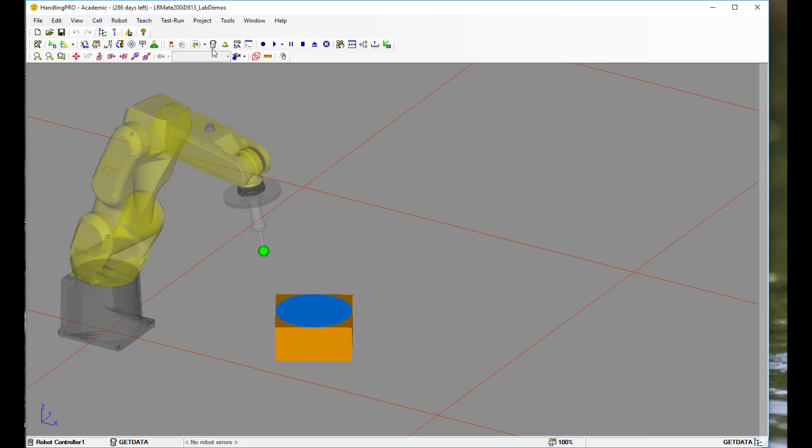So I'm just going to start up the Teach Pendant. Right now, before I do anything with the robot and starting a new program or a new frame or anything, I want to make sure it's in a neutral position. So when you first start out, click the position button. What you want is to have most of the joints pretty close to 0, except for joint 5, which should be close to 90 degrees, which means that the pointer would be pointing straight down.

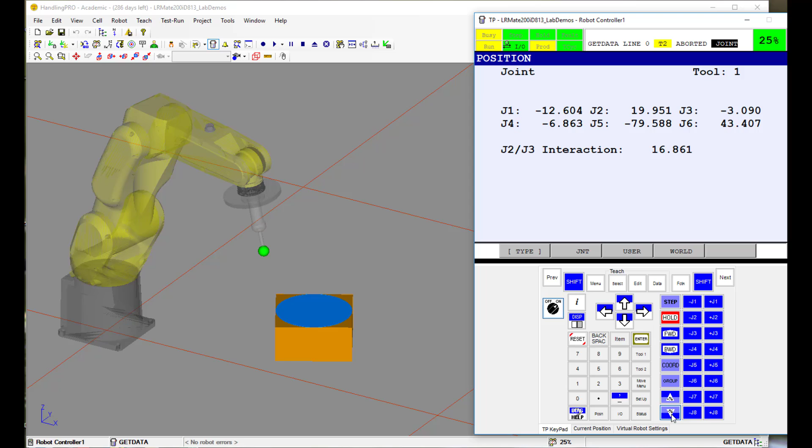So I'm just going to make a few adjustments here. I need to turn on the Teach Pendant and bring the speed down a little bit so I can control it better. And get joint 1 a little closer to 0. That's good enough. Joint 2. Joint 3. Joint 4. Whoops, I went a little too far there. And joint 5 is pretty good. It's about minus 80, which is close enough to minus 90, so I'm going to leave it where it is.

And joint 6 is the other one. This is the most important one because it's impossible to tell by looking at the robot what the angle of joint 6 is. If you've been using the robot, sometimes it can end up twisted almost 360 degrees from its neutral position. And what will happen is when you try to do a move, you might run into an axis limit because it's trying to move and it can't move joint 6 any further. All right, so that's pretty close to a neutral position.

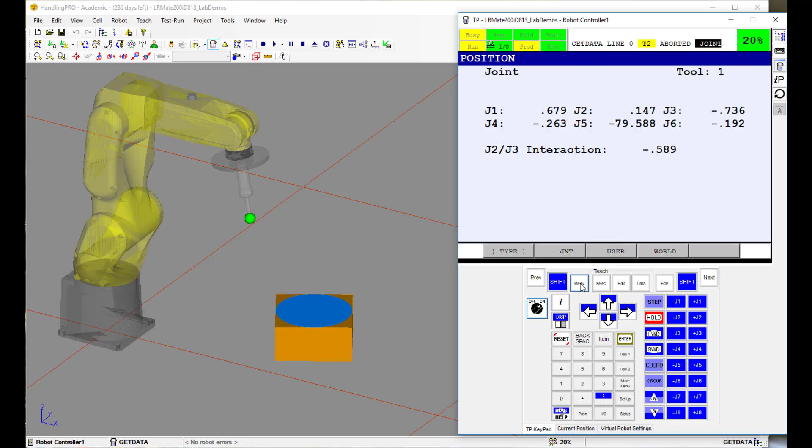So what I'm going to do now is go to the menu and set up frames. Oh, it looks like it's defaulting to user frame. Normally it defaults to the tool frame window, and if that happens, you just click other and then user frame. Okay. So I'm going to use user frame 1, just hit enter. And here are my 3 points. I'm going to put my origin here at this corner. This is going to be the X direction, and then that's going to be the Y direction.

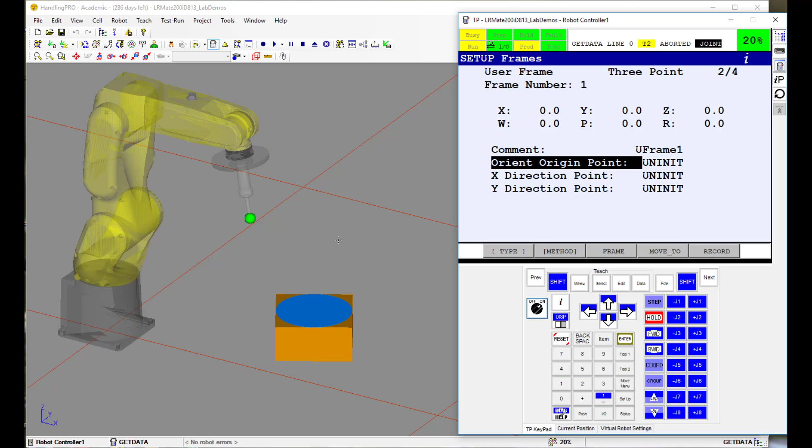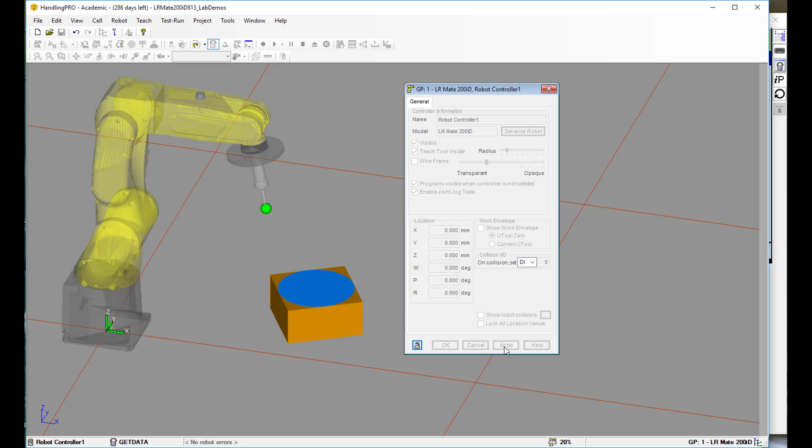So with Roboguide, it's very hard to tell with your eye where the tool center point really is. So we're going to have to do a couple of things. One of which is, if you haven't already done it, double click the pointer tool and make it mostly transparent so that you can see through it. That way you're going to be able to see the tool center point even if you're looking from the top. If you double click the robot body, there's a transparency setting for that as well. That's going to help you always see where the tool center point is when you're doing your frame or programming.

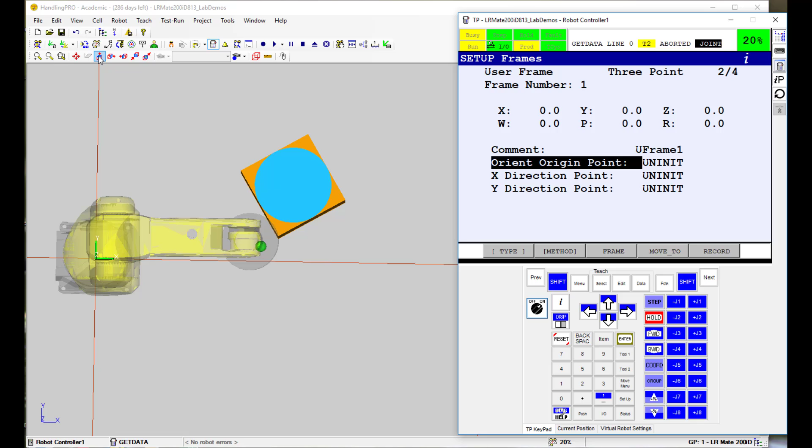So the next thing is to get roughly positioned above, and then up here, these are the orthogonal views for Roboguide. I'm going to use the top view, and what it does is it straightens out the robot.

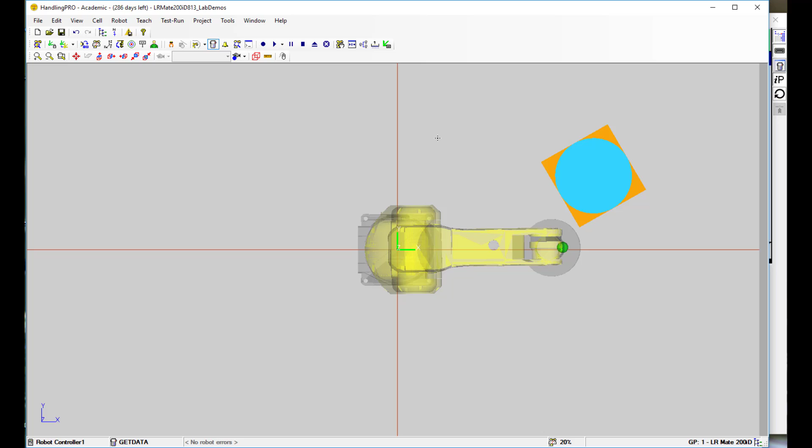So I'm looking at it exactly from the top view. So the Z coordinate is not really having any effect. I'm only going to be looking at X and Y. Now I've just done this and I want to be able to slide this over. The key combination for that is Control right drag. That's going to be very useful. Control right drag and then zooming in and out with the roll bar on the mouse.

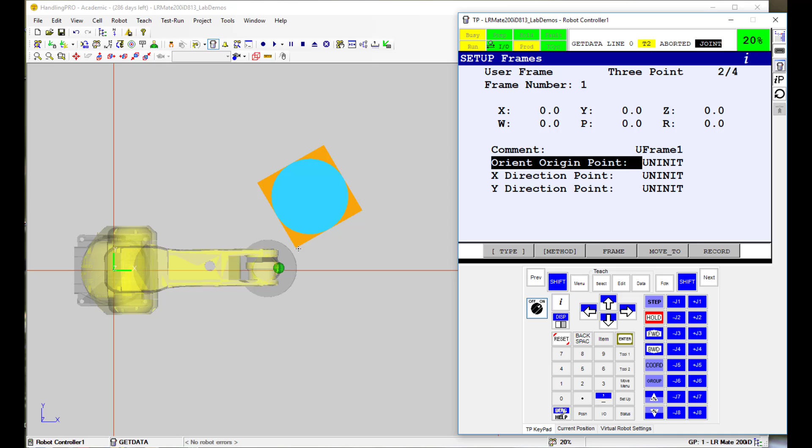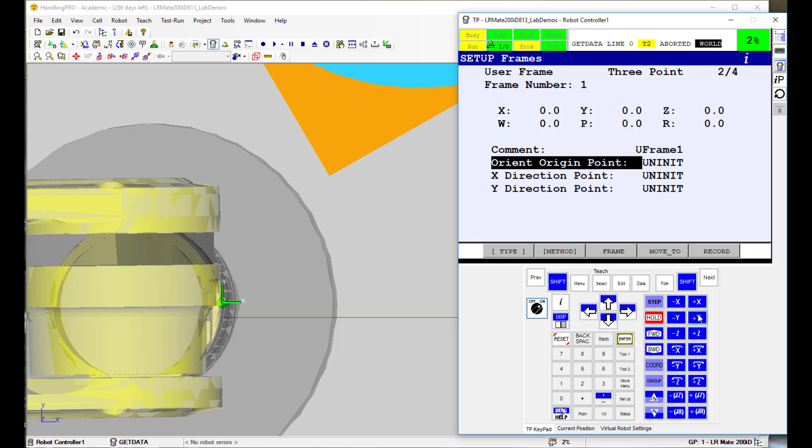So what I'm going to do is position myself over this corner, which is the origin point. And I'm going to zoom in a little bit first and slow the speed way down. And I want to go to world jogging. So right now I'm in coordinate. I'm going to click until it says world. And so I want to go, this is my positive Y direction. Positive X direction.

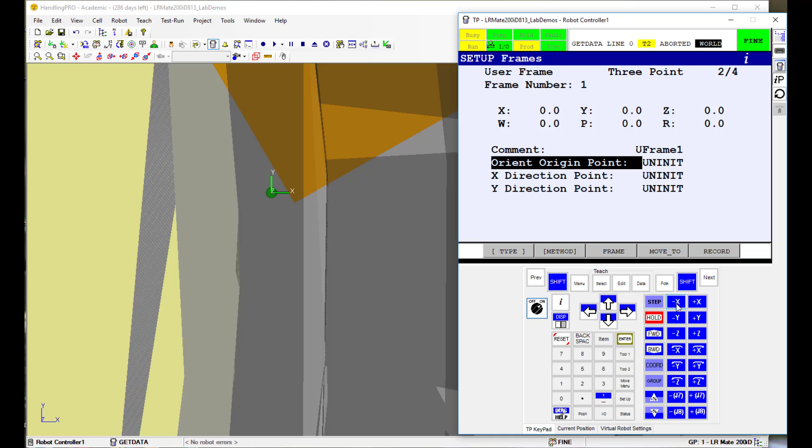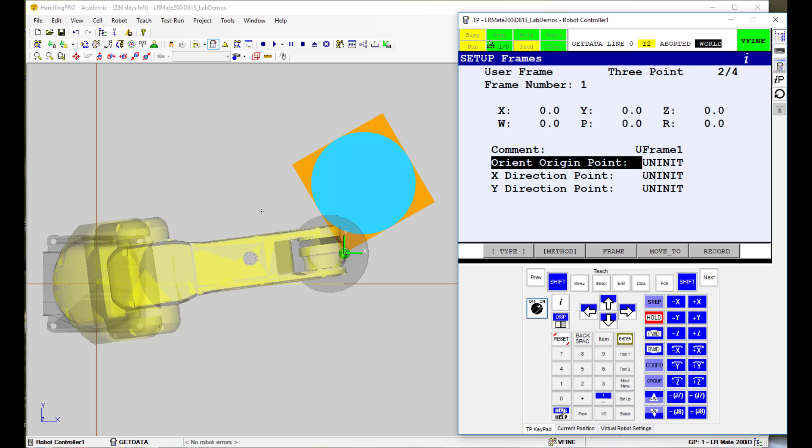And then I can knock the speed down to fine. And then down to very fine. And that is right on the point. That's as close as I can get. So now that's, remember, that's just in the X and Y direction. So if I zoom out, now I have to come in from the side.

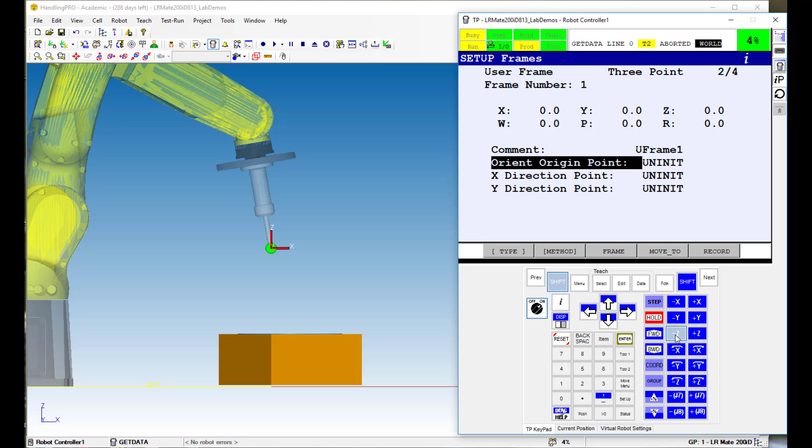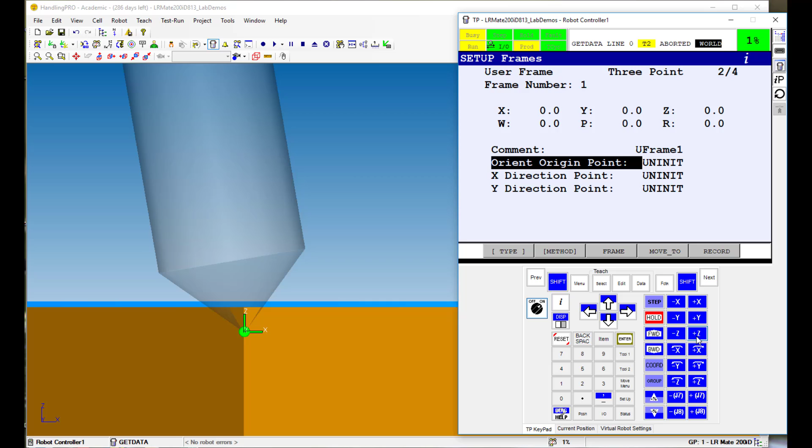And so I'm going to choose a side view. And I'm going to bring this down in the Z direction. So I've got to speed up quite a bit. Okay, I'm pretty close. Now I'm going to zoom in, bring the speed down. Oops. Oops. And then go down to fine.

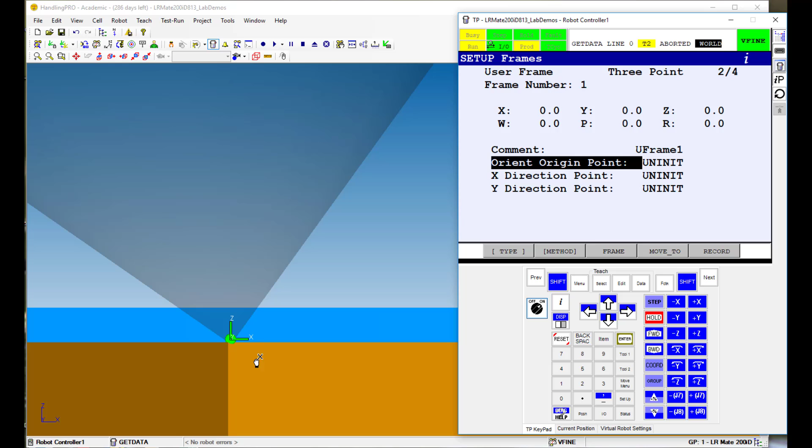And that's good. I'm going to have it just a little bit above the shape, only because if I put it too far in, it won't be visible when it traces the path in the program. All right, so that is my origin. And so I just click Shift, Record. And now I can move on to the X direction point.

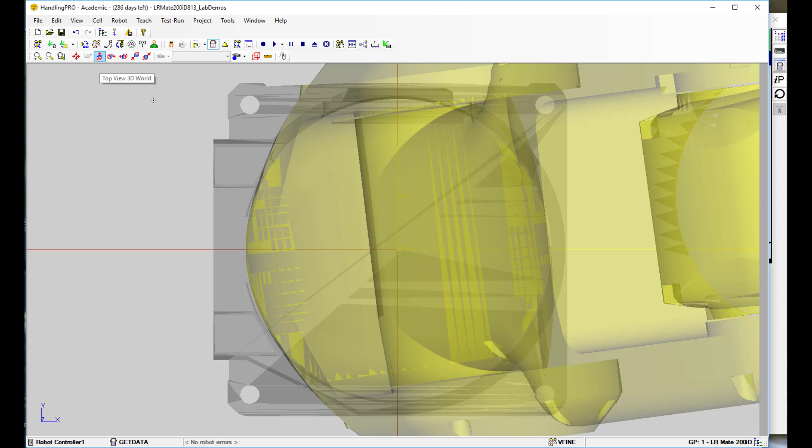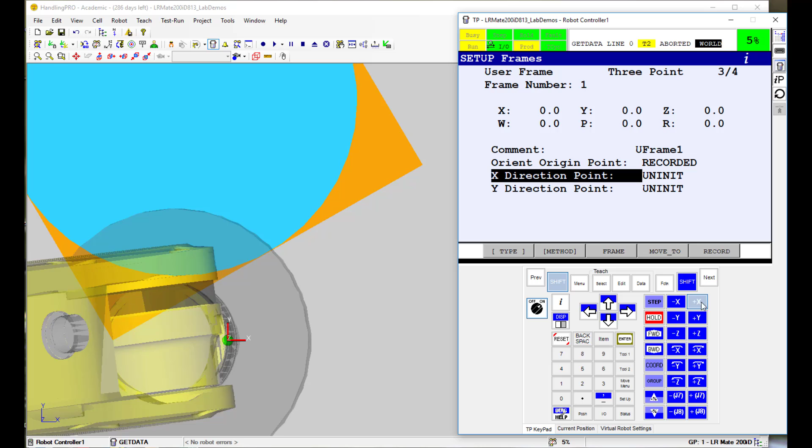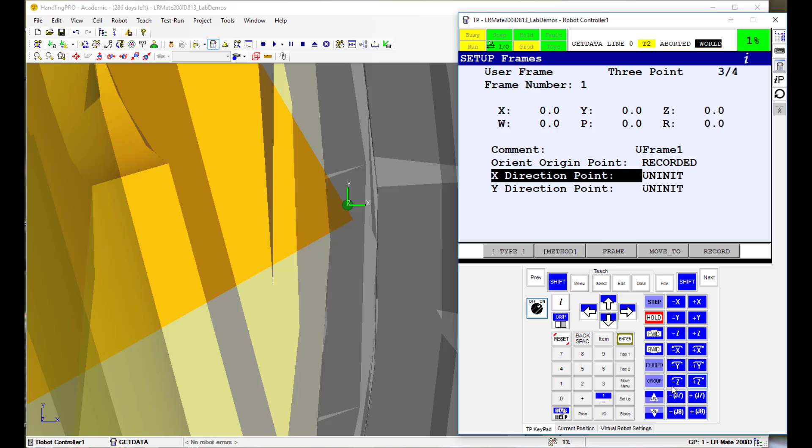So I'm going to go back to the top view and pick the orthogonal view one more time. And now I'm going to jog over to this point here, and that'll be my X direction. Okay, zoom in. Bring it down to a slower speed. All right, go down to very fine. And that's as close as I'm going to get.

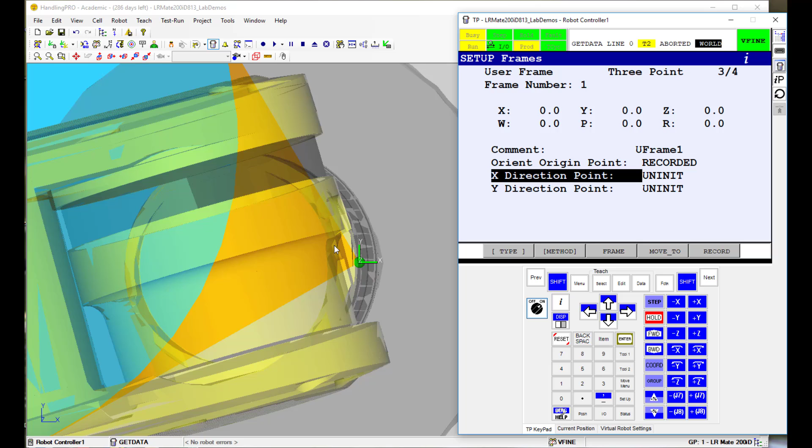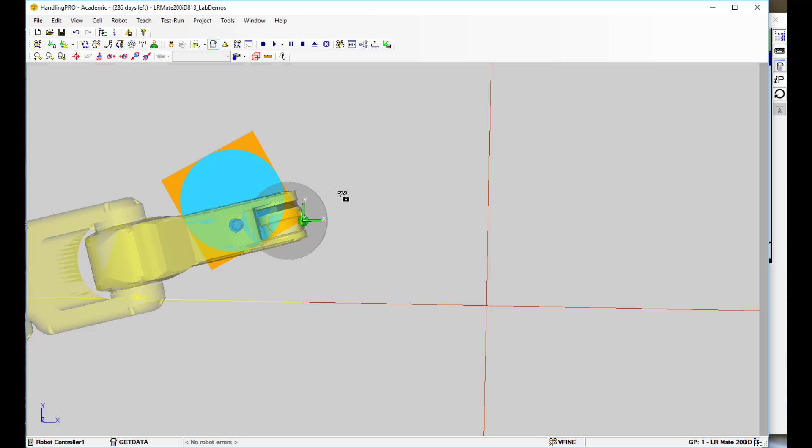Oh, about that. Okay. Now, I don't have to deal with the Z direction because I already had brought this down, and these points are all in the same plane. So I'm all set then to record the X direction point. All right, now I've got to move to this opposite corner over here. Again, top view. Bring the speed up.

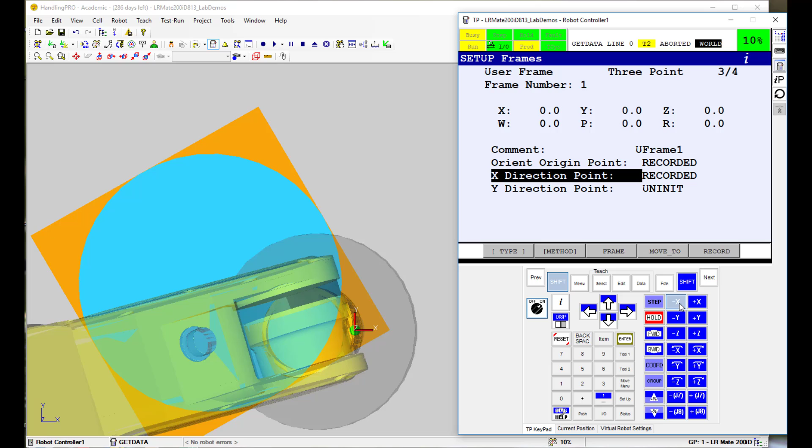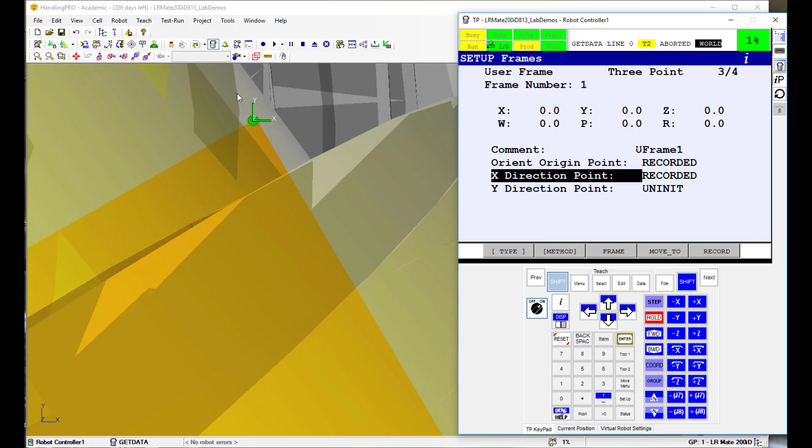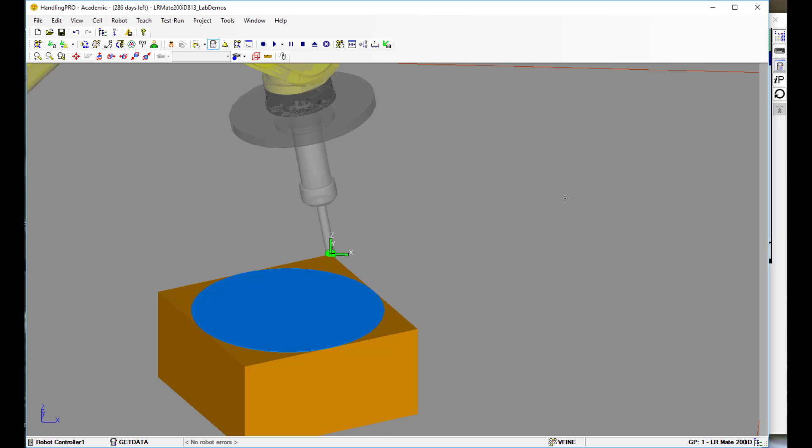Zoom in. Bring the speed way down. Zoom in a little bit more. All right, that's as close as I'm going to get. And that is going to be my Y direction point. Okay, so I've got a user frame recorded.

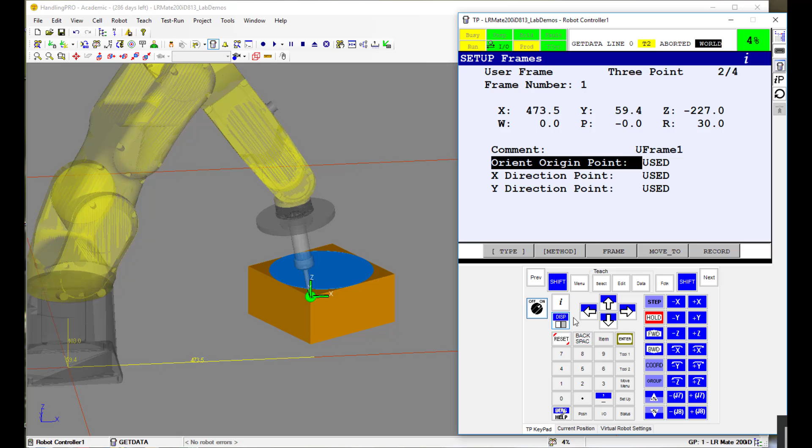So to test the user frame, I have to do two things. The first thing, whoops, what I'm going to do first is move to the origin. So that's the origin point. And I need to set the user frame. So shift coordinate, and it says user frame 2. That needs to be user frame 1 because that's the number of the user frame I was in.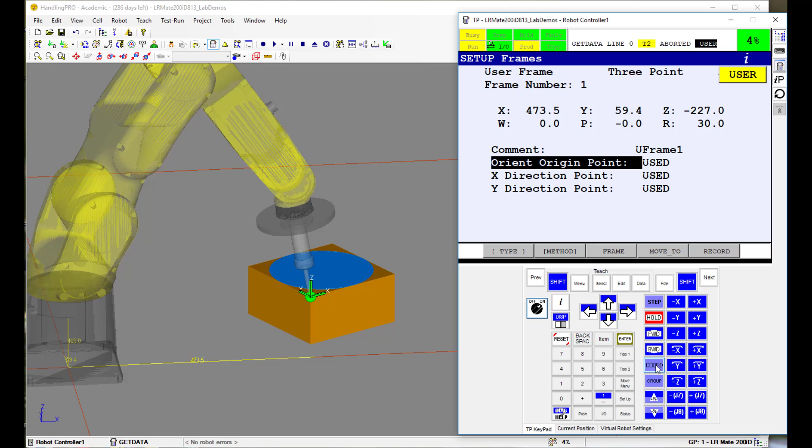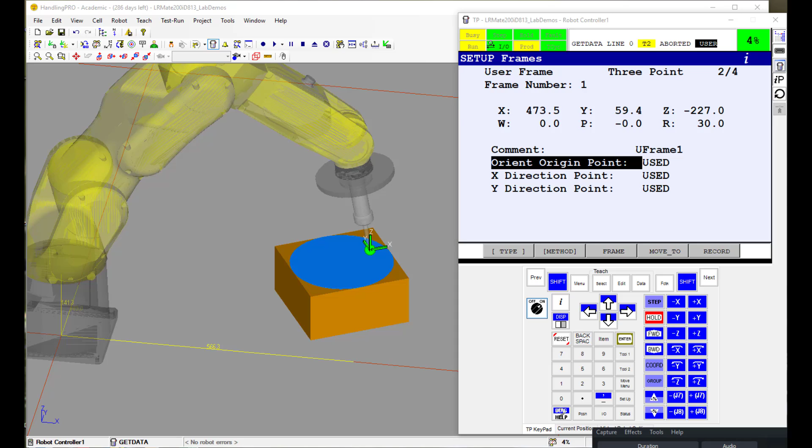The second thing I have to do is click coordinate until it says user. Okay, so that is now using the frame I just created. So when I jog in the X direction, it should now be following along the edges of the square. And same thing with the Y direction. And I also want to make sure Z goes up. Okay, so that's the creation of the user frame. I'm going to stop here, and in the next video, we'll get into creating the shapes program.